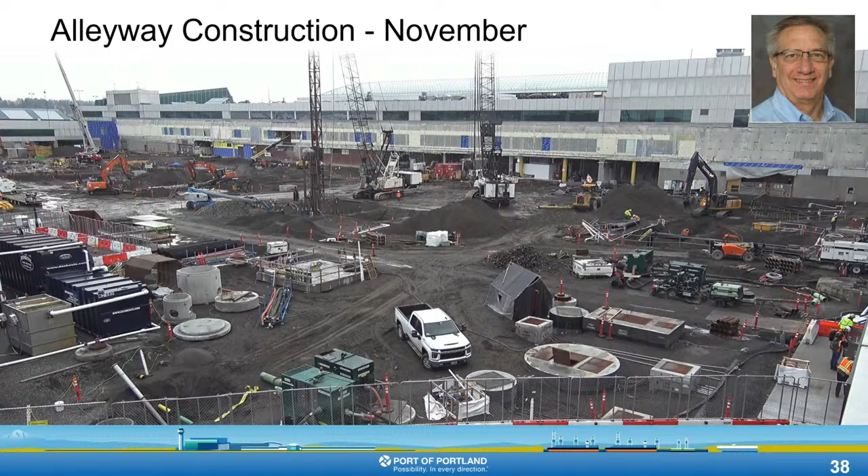There's been a lot of work in the alleyway between concourses C and D. If you remember, probably the last time we showed, we had some pretty significant holes in the ground to do the fuel system underneath the concourses. In November, this is a picture of some of the work that's ongoing there. It was a lot of the piles - over 650 vibratory piles were installed. Those are all complete. The sanitary waste system, the lift station, which was right outside of the building, has now been moved further out. All that's been completed.

If you look at the space out there, just last month, all the piles are done. It's a lot of the substructure work for preparing the columns for the new building. A lot of the substructure electrical, all of that's being completed right now. So come the March timeframe, when we start the building structural demo, all this work will be pretty well done. There'll be a crane pad put in to enable the building to be demolished, and then eventually a crane pad for the roof installation.

A lot of the work activity right now is around upgrading the structural slab of the old 1956 building. If you remember, the building is stitched together from a series of projects that have occurred since the original construction. One of the problems that came up is we removed the topping slab on the old 1956 building. There was a series of penetrations that were no longer properly supported, which could potentially fall down onto the baggage handling system area. So we spent about 4 months' time really improving the safety of this space. We also discovered a lot of asbestos in the slab that we had no idea was there. So the net result of this was a significant impact to the project schedule.

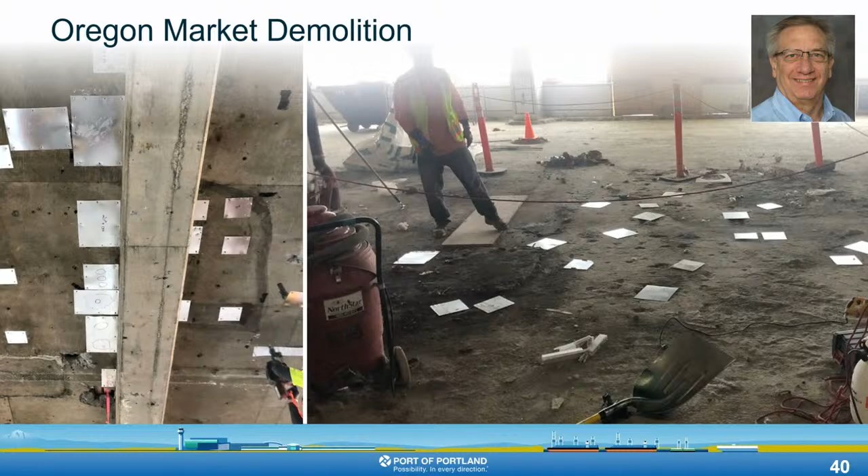So right now that slab, as it was removed and supported, there's a new topping slab put in. You can see all the rebar here on this drawing that will enable the existing slab and the existing building to really strengthen and be tied together.

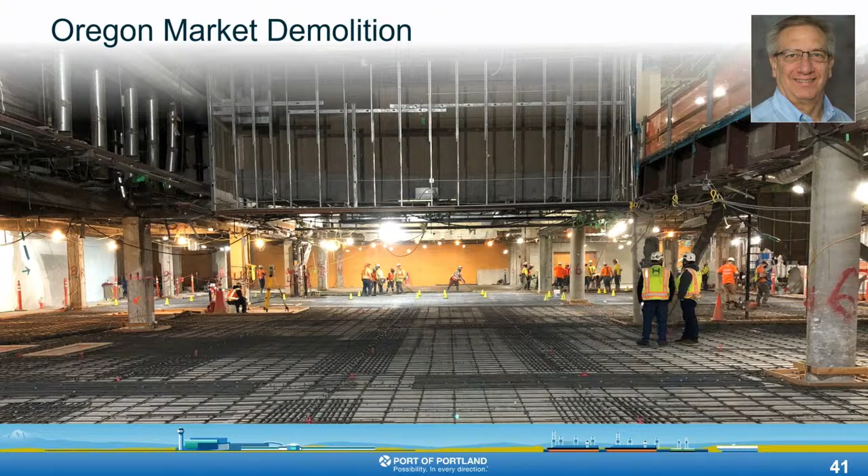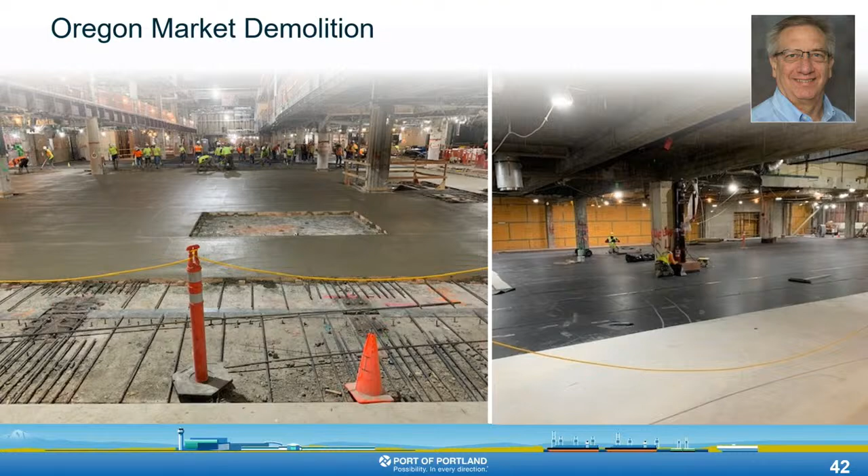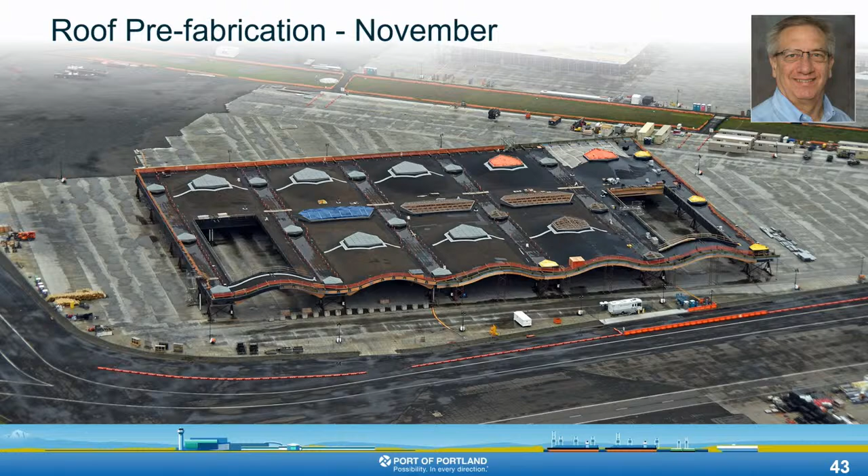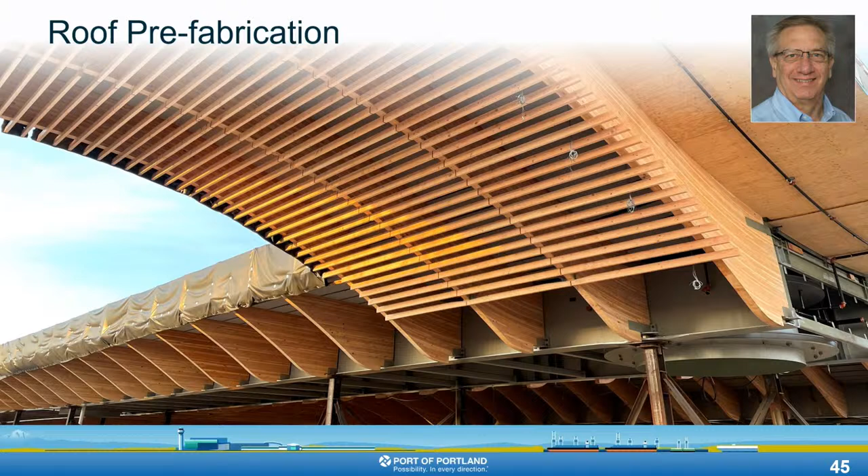A couple of images of the lattice installation. This is the first area that was complete. Above the lattice and the roof decking is all the sound insulation, the fire sprinklers, the electrical. In this image, you can see some of the electrical wiring hanging out. In the future, we'll have some componentry as well as some lights installed.

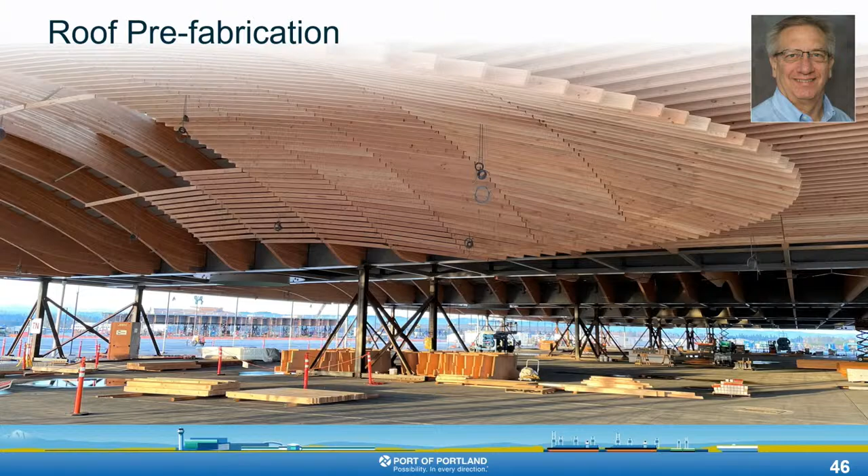And then as you look towards the east, towards where the ticket lobby will be, there's some skylights in this area. And then looking back with the lattice work as it's complete, this area is set ready for lights.

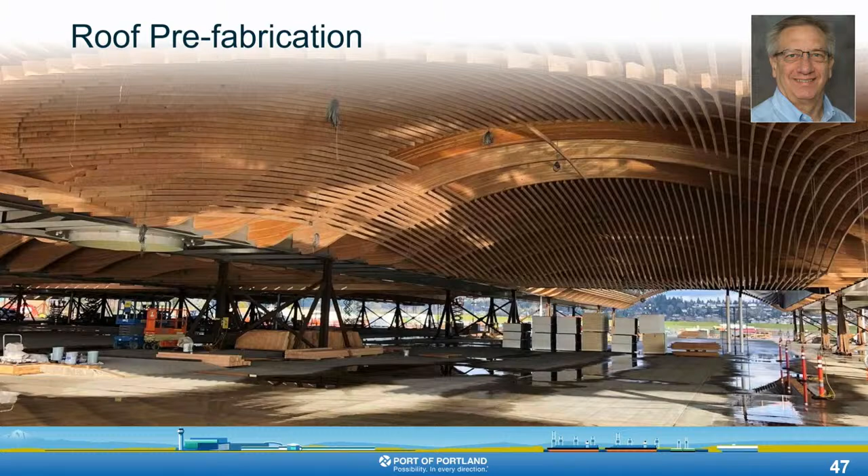And then starting in the June timeframe, we start disassembling this section to bring it over and put it over top of the terminal building.

From a schedule perspective, this is, I think, the 23rd presentation to Commission for action items on the project. We anticipate being back for the GMP and then a couple of design contracts, commissioning, and design construction administration going forward. With design complete, we'll be establishing the final GMP. We'll bring that back hopefully in the April timeframe for you.

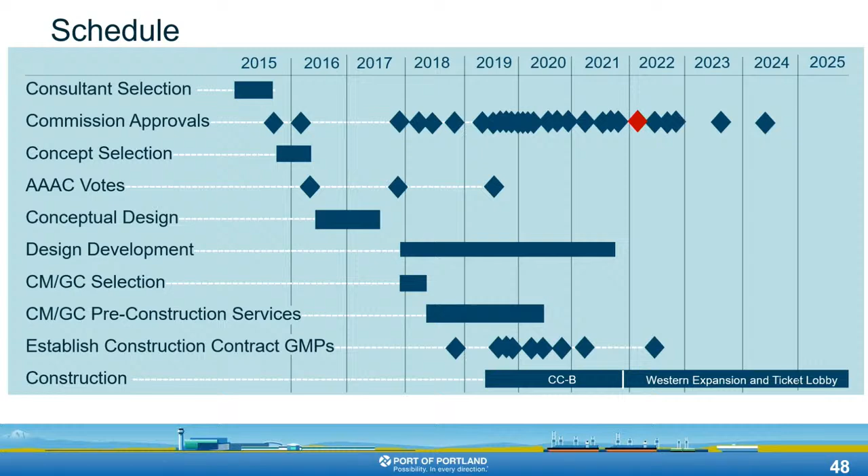Right now, big picture in the schedule, we're anticipating the western expansion and the ticket lobby being operational April of '24, and then the north and south nodes in the fall of '25.

As Vince mentioned, the cost is increasing. This is the current budget. The cost is increasing, and we do not think the current budget will be adequate. There's exposure out there with some pretty unprecedented escalation. We still have about $450 million to bid, and we've been seeing from a number of our CMGC firms, both the Hoffman-Skanska team as well as others, anywhere from 16 to 20% construction escalation year over year. There's also a lot of market uncertainty as you come out of COVID, market conditions with delivery, labor cost escalation, and then the schedule impacts that I mentioned earlier, primarily associated with the seismic upgrade. All of those are causing stress to the project budget.

We're working with the Hoffman-Skanska JV and the trade partners to look at opportunities to reduce cost and also how we can provide more certainty to the budget quickly. We've been communicating with the airlines on the pricing and their request to us to quickly establish a GMP. From a construction small business participation, we're running a little below that 20%, but this next package, design package F, which is about $450 million, is anticipated to be about 21% small business participation.

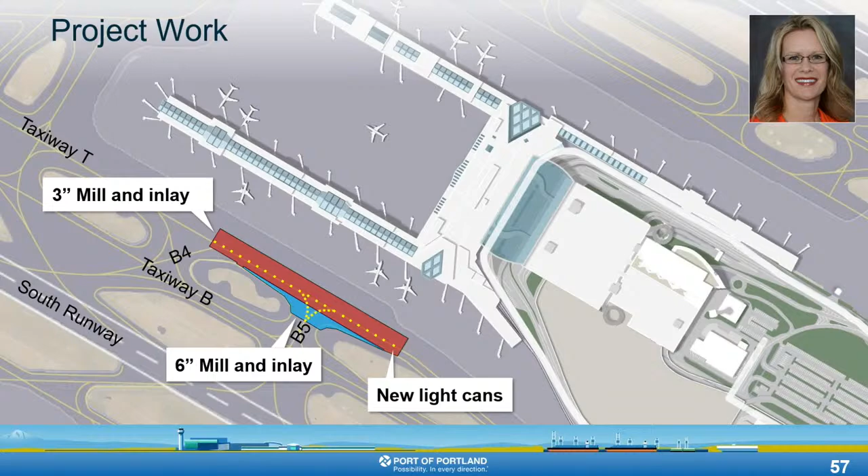Thank you, Steve, and good morning. Today I'm requesting approval to award a construction contract to Lakeside Industries for the Taxiway T Rehabilitation, exit B4 to B5, in the amount of a little over $1 million. This shows the overall project location, just south of the PDX terminal. It entails a 3 and 6-inch mill and pave back and new light cans. Very straightforward project.

Staff requests approval of the Executive Director's recommendation. Thank you.

Thank you for the presentation of materials. Very straightforward. Do we have any questions on this item?

Okay, seeing none, I will call for a motion and second to approve the Executive Director's recommendation. So moved. Do we have a second? Second. Thank you very much. Any further discussion on this item?

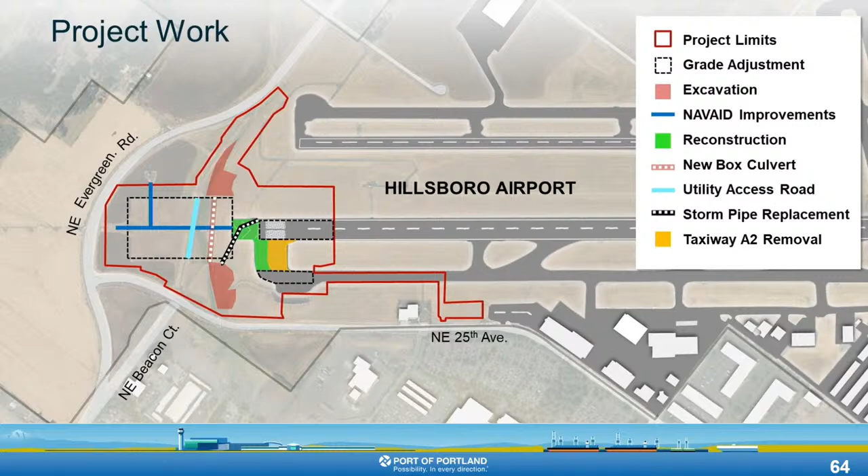Eric, I hate to interrupt, but my slides are not advancing. Okay, I am still looking at the commission action slide. I see schedule as well. Maybe I can just slow down and wait for the slides to catch up. Is anyone else having problems? No, I see schedule as well. Yeah, I don't see schedule. I see commission action. Okay, let me do a quick... I'll just go ahead and pause for a second. I'll give him a second.